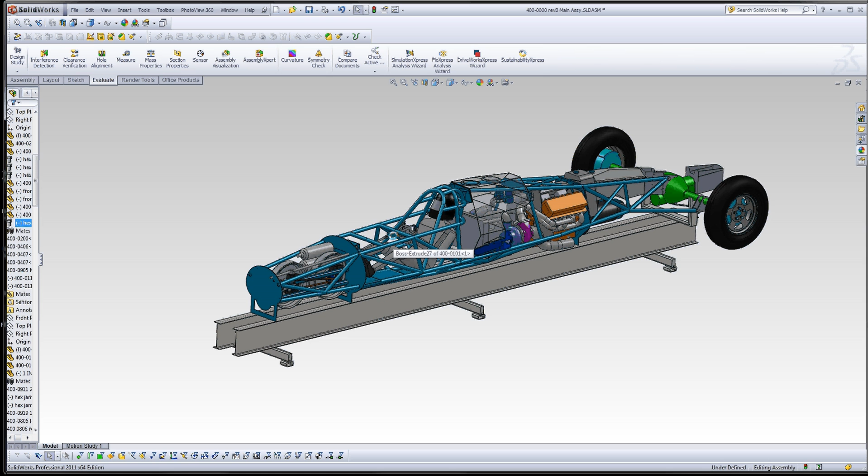Lately, the focus has been on finishing the engineering for the steering, and we actually made it work within SolidWorks now, so that if you grab the steering wheel and you turn the wheels, actually you turn the right way. We got about a 15-to-1 ratio: 15 degrees of steering wheel movement gives us 1 degree of kingpin movement, or steering radius change.

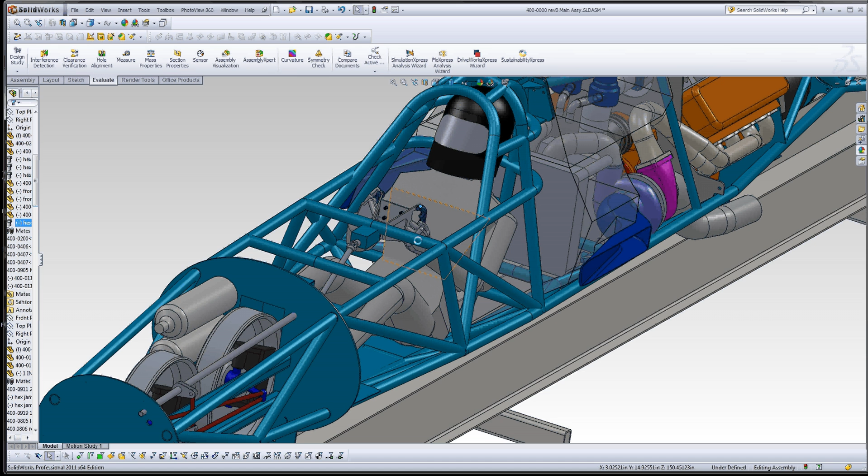This box here is just a fake box. It's not anything other than a plain box, but to keep the model simple. This will actually be a 2-to-1 gear quickener that you can run in reverse so that it actually slows the steering down some more. I think at the speeds that we're going, we probably want to slow the steering down some more, and that will give us the 15-to-1, 150 degrees lock to lock to get us 10 degrees of wheel movement, 5 degrees each direction.

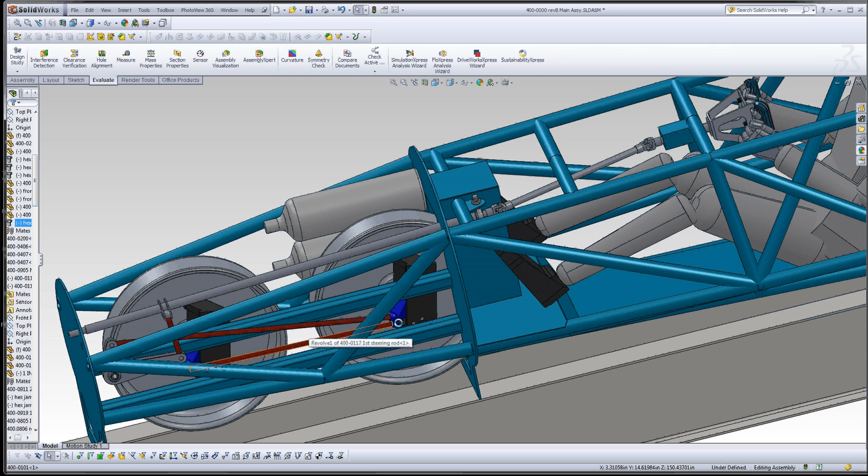The tie rod is on the bottom connecting the two of them. There's no drag link on this particular model, but the steering rod is perpendicular to the axis of travel for the spindle as the suspension moves up and down. So there should be very little bump steer when the suspension is actuated. You can see the actuation through here.

This is a hydraulic cylinder, and this slides up and down in this cavity here. It's designed for 1 inch of travel. It'll sit a 1/4 inch into travel at static weight on the starting line ready to go, and it'll compress down about another 1/4 inch once at speed at 500 miles an hour. It'll drop down another 1/4 inch.

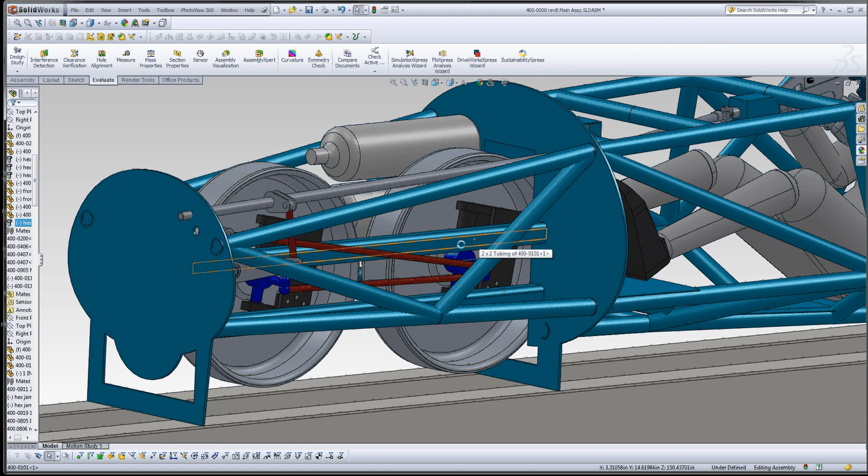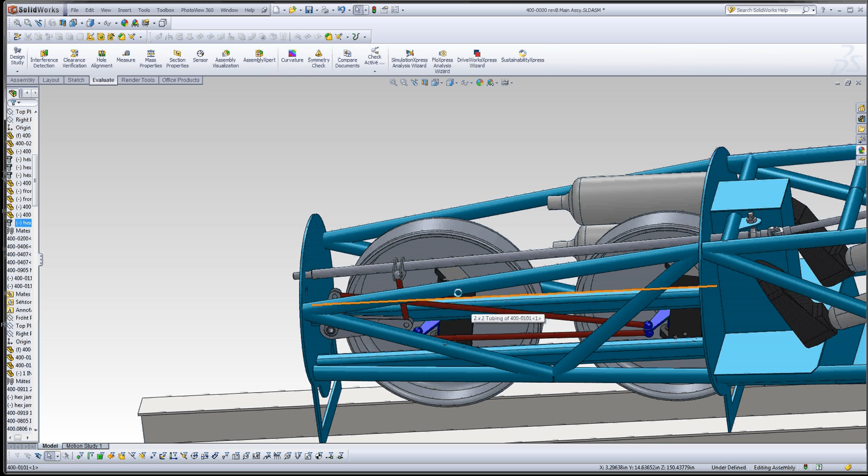Again, you can see the wheel movement. You can see everything else turn here if we grab the wheel and shake it. I don't think it's going to stay like this. I think we're going to bring another rod or something else off of this bar here and this bar here, coming in at an angle like this, and support this rod. That way it gives us more crush zone if the car gets hit.

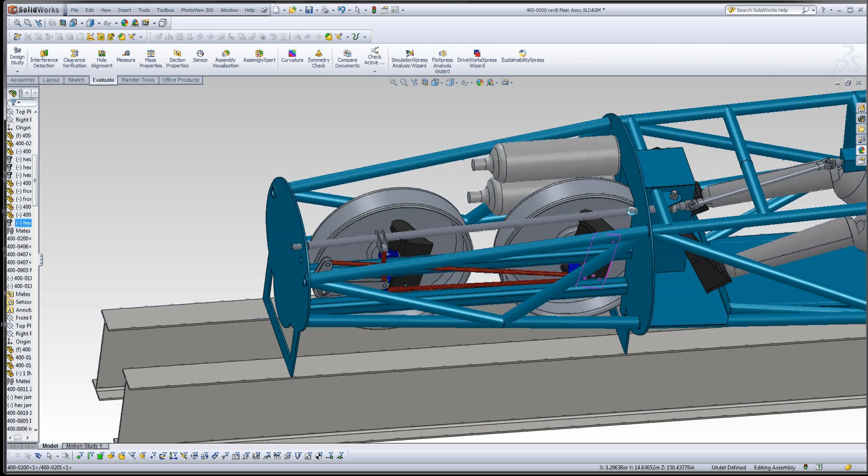If it gets hit any harder in the front, I'm going to have a giant collar in the back here that's also going to double as a steering limiter to limit the degrees of steering wheel movement to 150, and that will also stop it from pushing all these bars through into the cabin, into my face in the event of a crash.

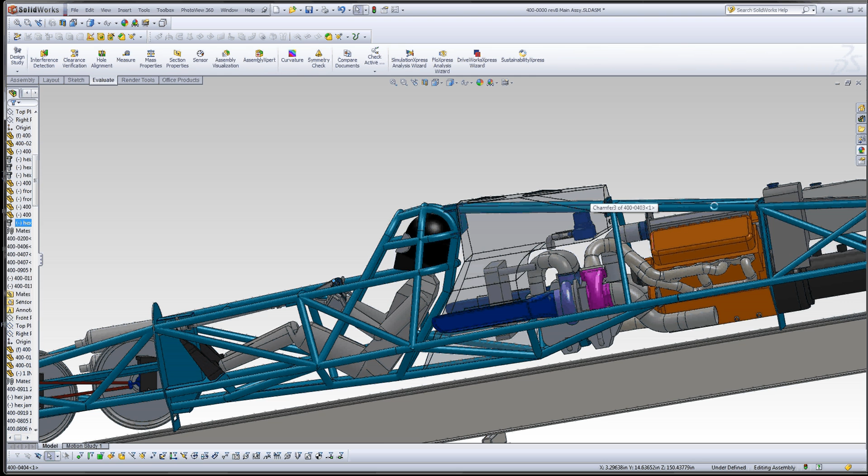You can see back here, all the engineering's done for the pumps. This tank is complete, mounted with the radiator. That tank's all done; it just needs to be finish welded. This tank here is the oil tank. This tank here is the fuel tank. Both these tanks are complete. This back here is the front parachute box and the rear parachute box. The front parachute box is all water jet cut out, but not bent up and welded yet.

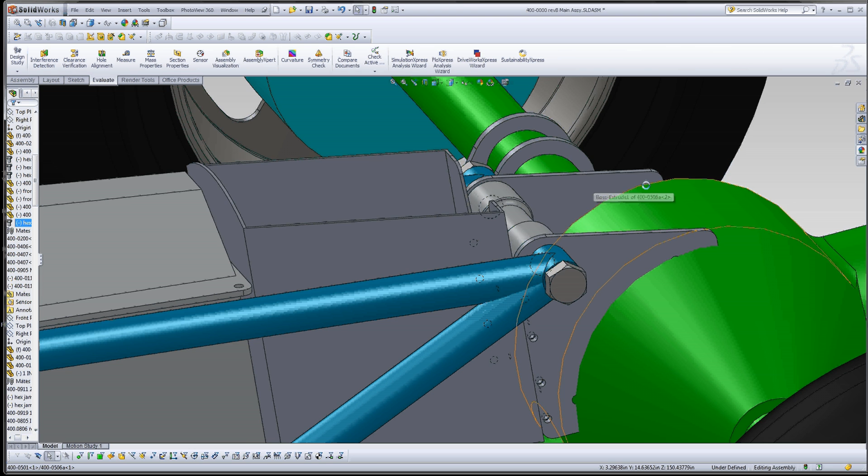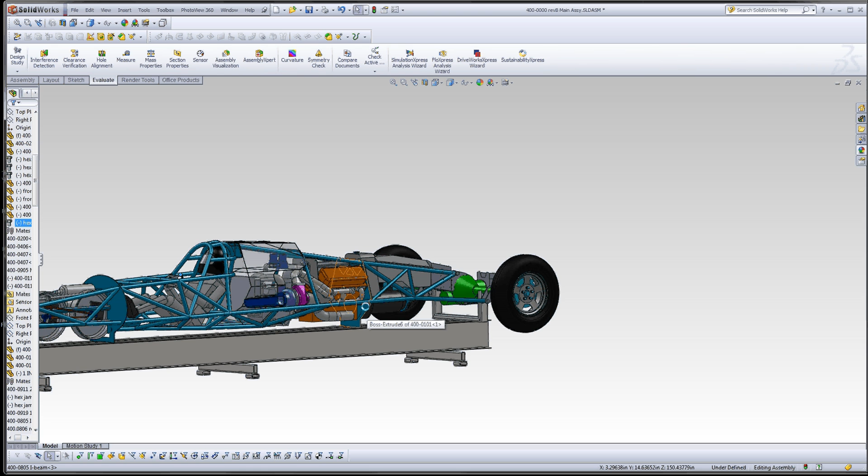These side plates here to go on the Winner's Streamliner are cut out, and they fit on the rear axle. It also has spacers that fit in here to keep it away from the center section and the casting, because they're going to sit on its spot faces. These pieces are done, and actually the mid plate is done, and I double checked that to make sure it fits on the motor. Thanks to JD, he gave me the specs for where all these holes have to be. You see them highlighted in orange there.

So as far as engineering goes, I'd say we're coming up on 95% of the way done. It's just little stuff from here on out. That's it.